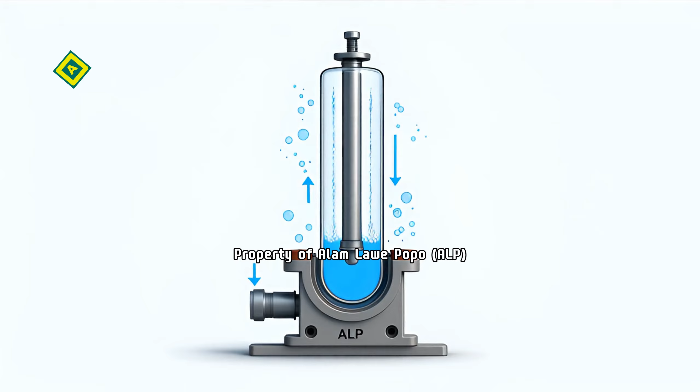A single-acting hydraulic cylinder uses hydraulic pressure to move the piston in one direction only. The return movement is achieved by an external force, such as a spring, or the weight of the load. This simple design makes it durable and easy to maintain. The main components are the barrel, piston rod, and end caps.

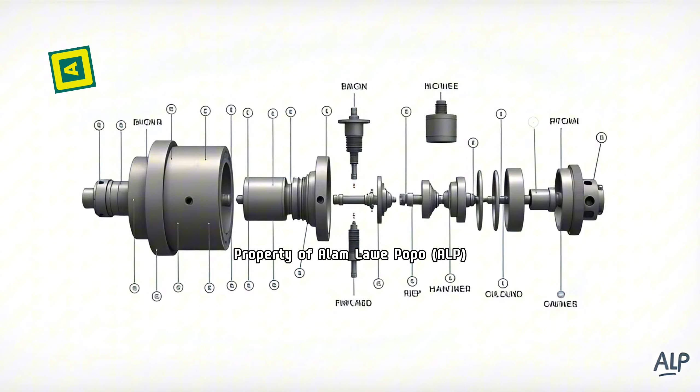Hydraulic oil enters through a single port to extend the piston. When pressure is released, the spring pushes the piston back.

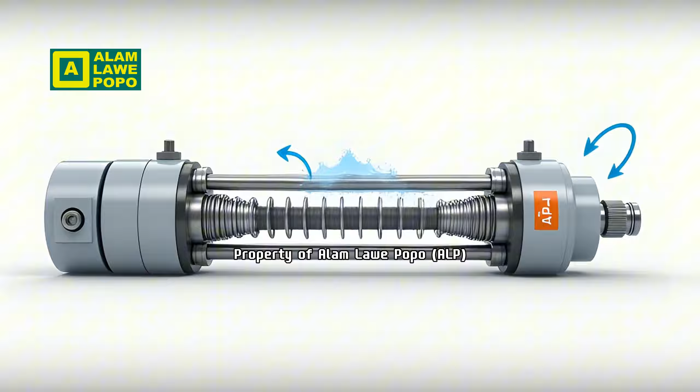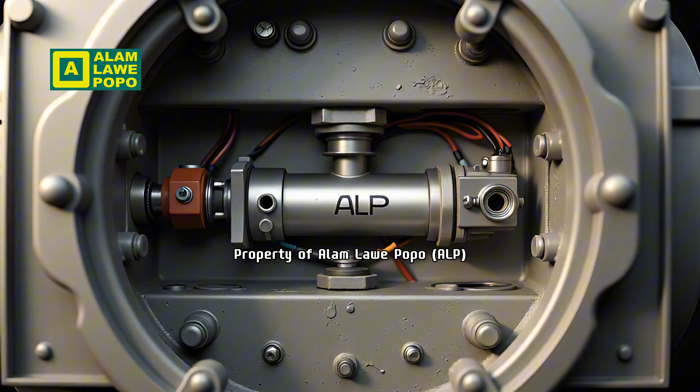Single-acting cylinders are commonly used where work is done in one direction. They are ideal for clamping, lifting, and pressing applications. The design is compact and suitable for limited space operations. They are often mounted vertically or horizontally depending on the task.

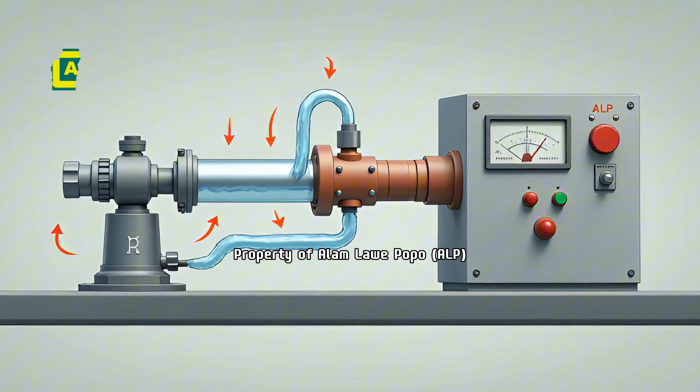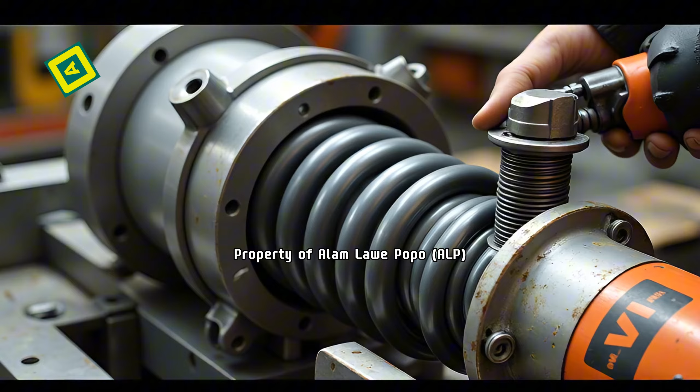The hydraulic pressure is controlled by a valve to manage piston movement. Proper sealing prevents oil leakage and maintains pressure efficiency. The return spring must be strong enough to retract the piston fully.

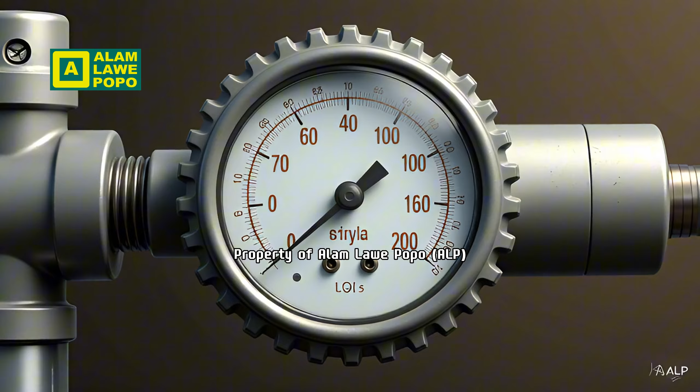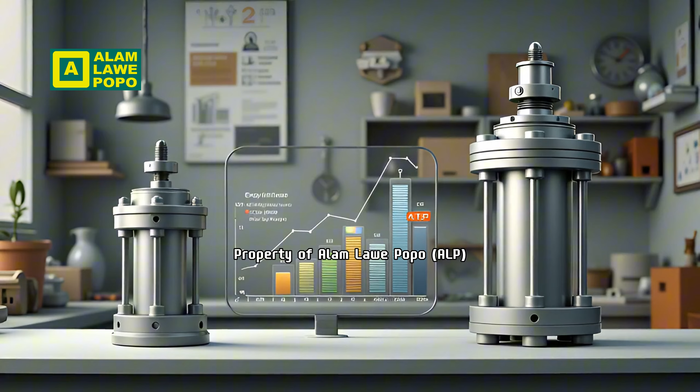In some designs, gravity helps retract the piston instead of a spring. The operating pressure of single-acting cylinders varies from 70 to 700 bar. The speed of extension depends on oil flow rate from the pump. Smaller cylinders use less oil and are more energy efficient.

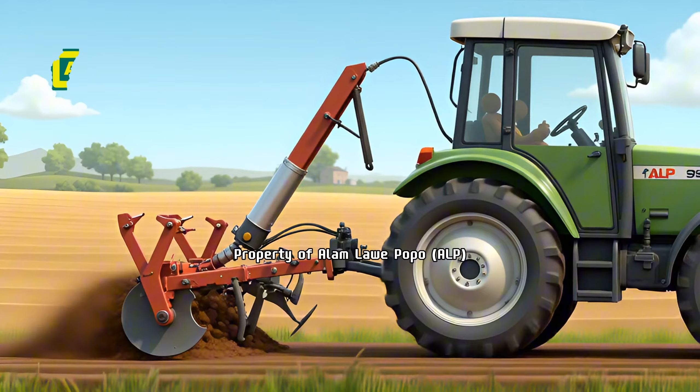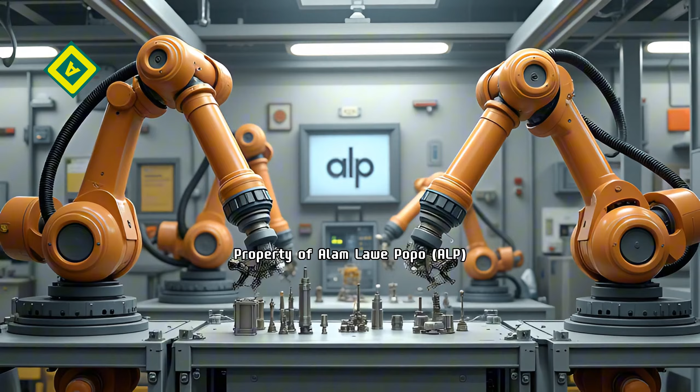They are commonly found in car jacks and hydraulic presses. Agricultural equipment also uses single-acting cylinders for lifting tools. Construction machinery uses them for simple lifting and pushing operations. Industrial automation sometimes integrates them into production lines.

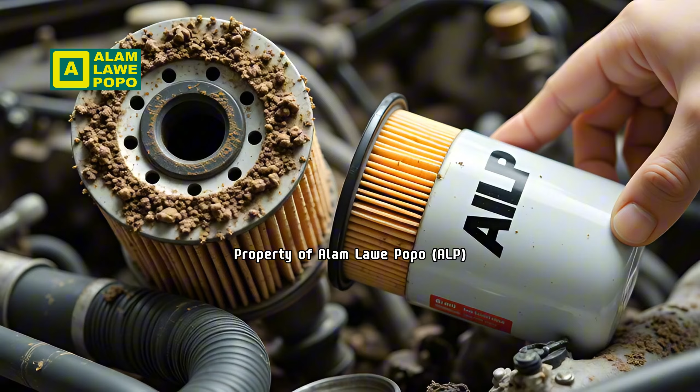Maintenance includes checking oil levels and inspecting seals regularly. Contaminated oil can cause internal wear and performance loss. Always bleed air from the system to ensure smooth movement. Avoid overloading the cylinder beyond its rated pressure.

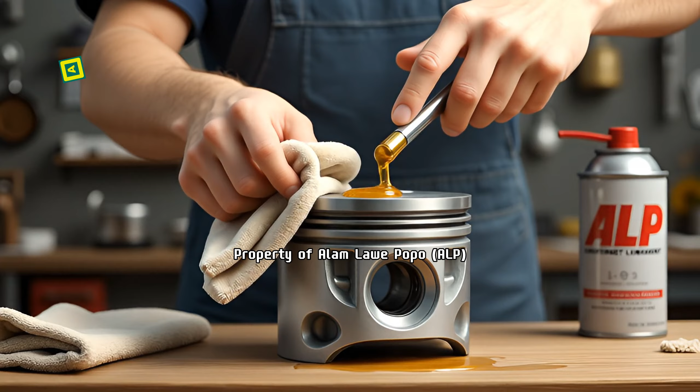Regular lubrication prevents corrosion and extends service life. When properly maintained, single-acting cylinders last for years. Understanding their operation helps in designing efficient hydraulic systems.

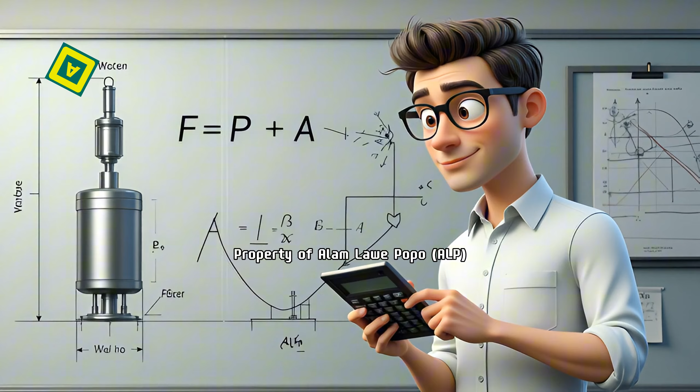Let us explore how to calculate the output force of a single-acting cylinder. The output force equals the hydraulic pressure multiplied by the piston area. Example: if pressure is 100 bar and piston area is 10 square cm, the force is 10,000 N.

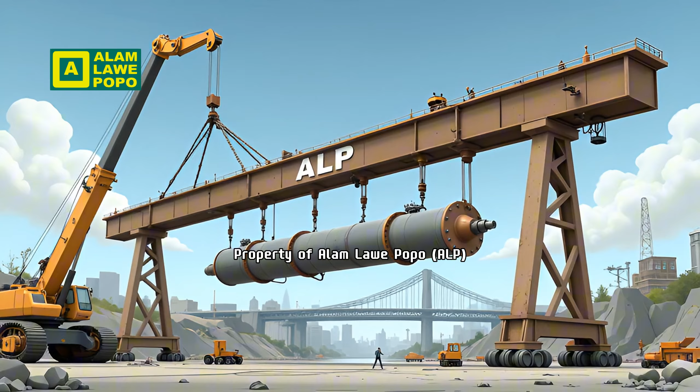Cylinder stroke length determines how far the piston can extend. Longer strokes allow greater movement but require stronger support. Cylinder mounting affects stability and load alignment.

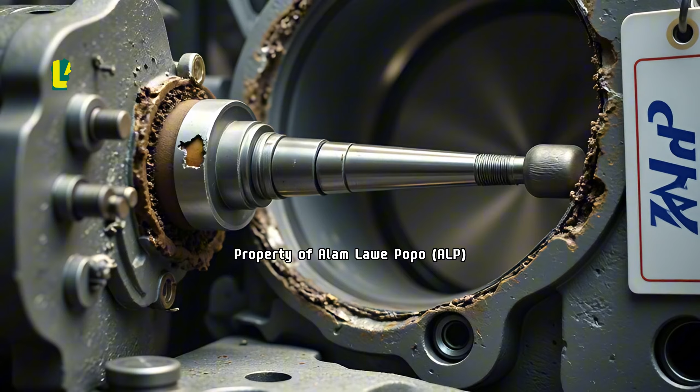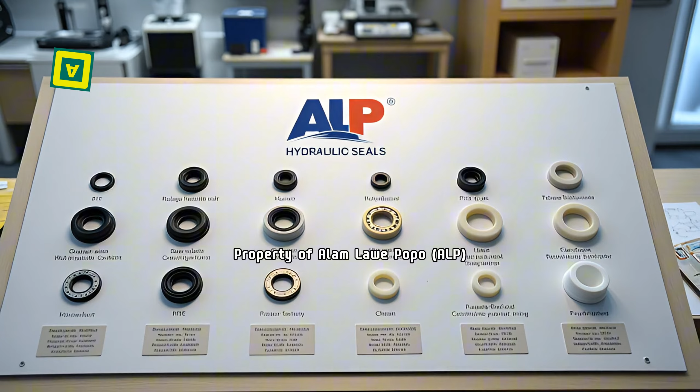Misalignment can cause side loading and premature wear. Always ensure the piston rod moves straight without bending. The seal material must suit the operating temperature and fluid type. Incorrect seals can lead to oil leakage and system failure.

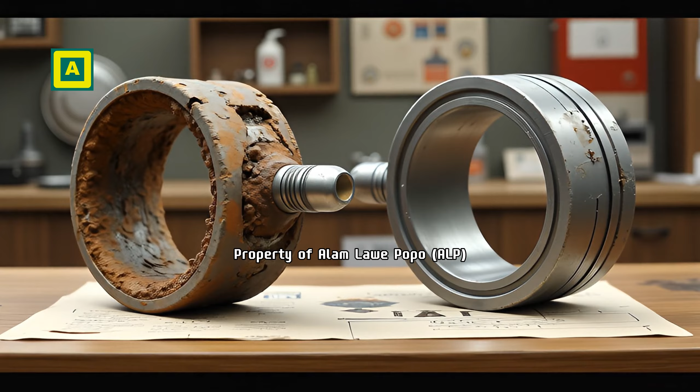The rod surface should be smooth to reduce friction and seal wear. Corrosion on the rod can damage seals and reduce efficiency. Use protective boots or wipers to keep dust away from the rod.

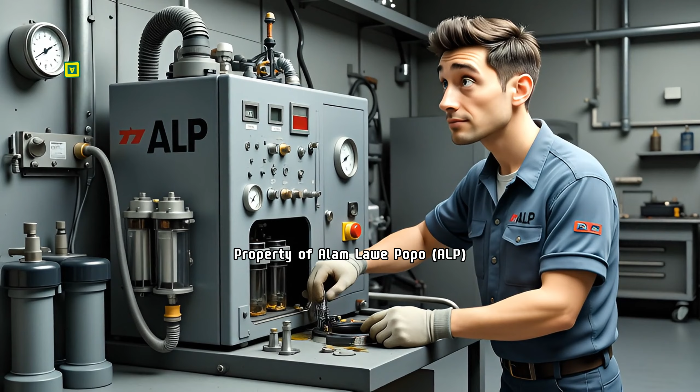Hydraulic oil cleanliness is critical for smooth operation. Contaminants like dirt or water can damage internal surfaces. Always use recommended hydraulic fluid for the best performance.

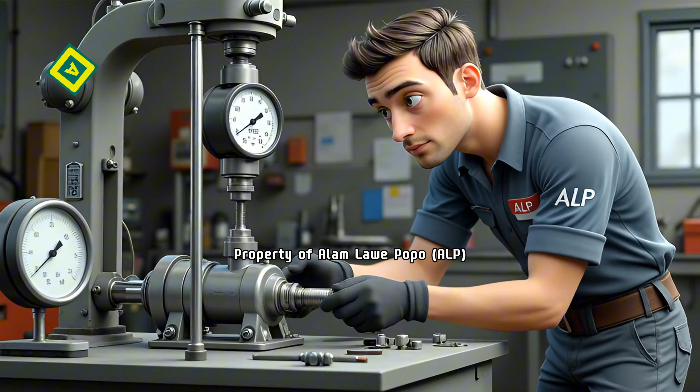Cylinders should be tested for leaks before installation. Test pressure should not exceed 1.5 times the working pressure.

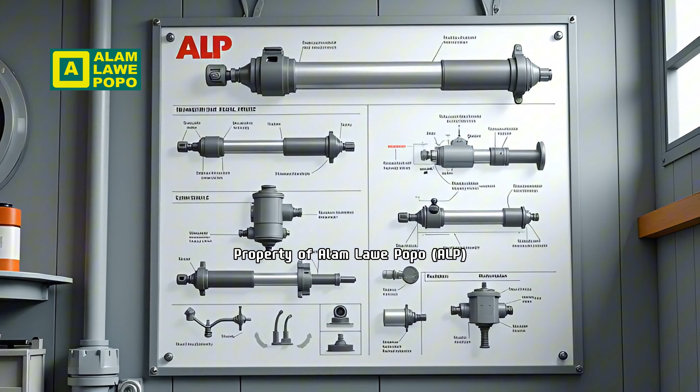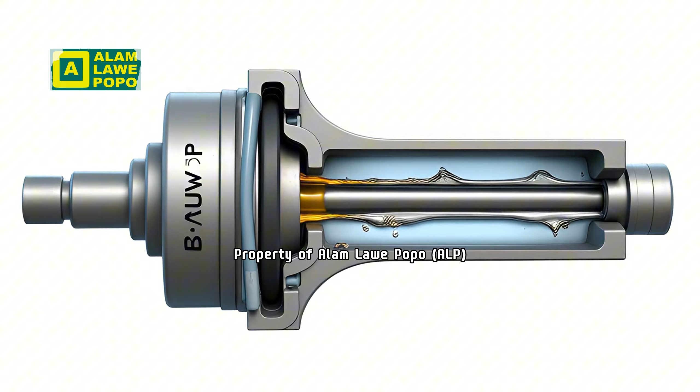Common problems include slow movement, internal leakage, or weak retraction. Slow movement often means low oil flow or a blocked line. Internal leakage happens when seals are worn out. Weak retraction could indicate a broken spring or trapped air.

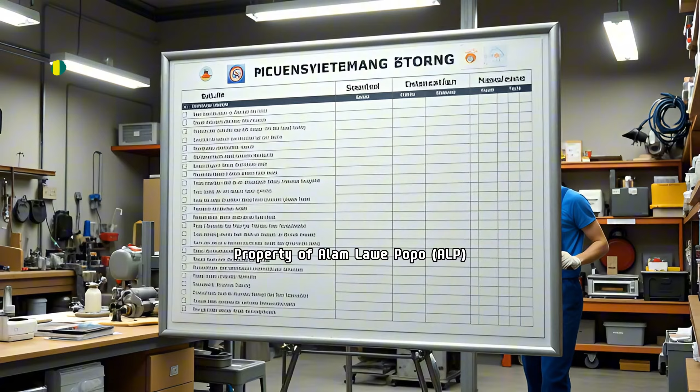Regular inspection helps detect issues early and avoid downtime. Store cylinders in a dry place and protect the rod surface from dust.

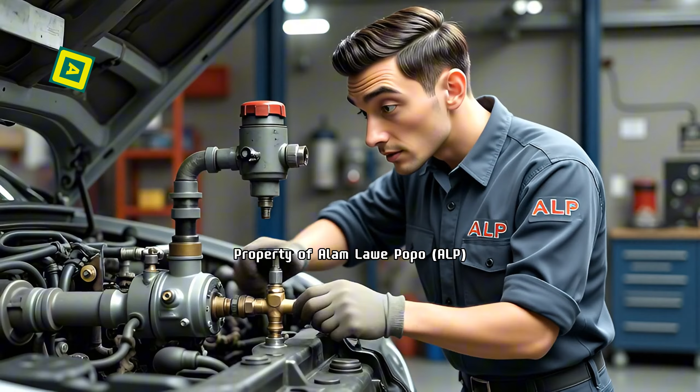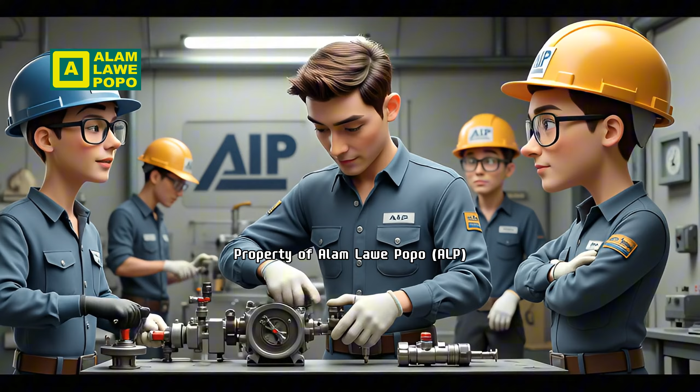Always relieve system pressure before disconnecting any hydraulic line. Use proper fittings and hoses to prevent oil leaks or bursts. Safety is vital when handling high-pressure hydraulic systems.

Single-acting cylinders remain a reliable choice for simple, efficient motion. Their simplicity makes them affordable and easy to repair.